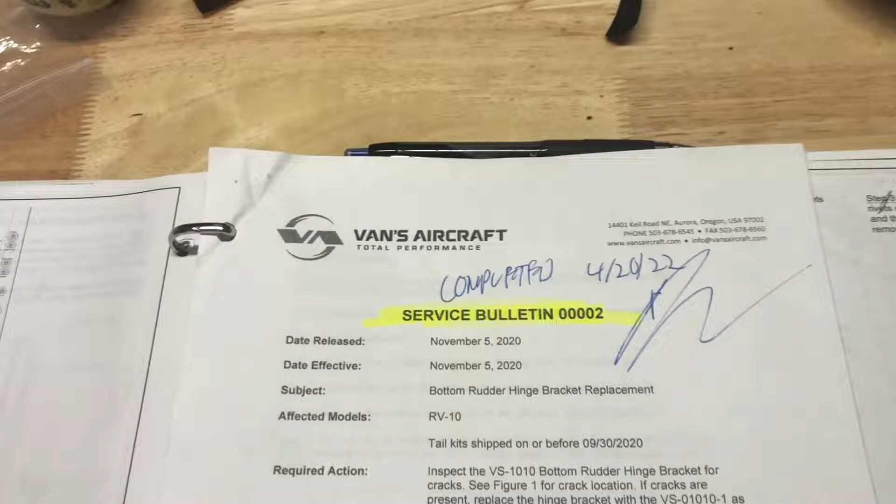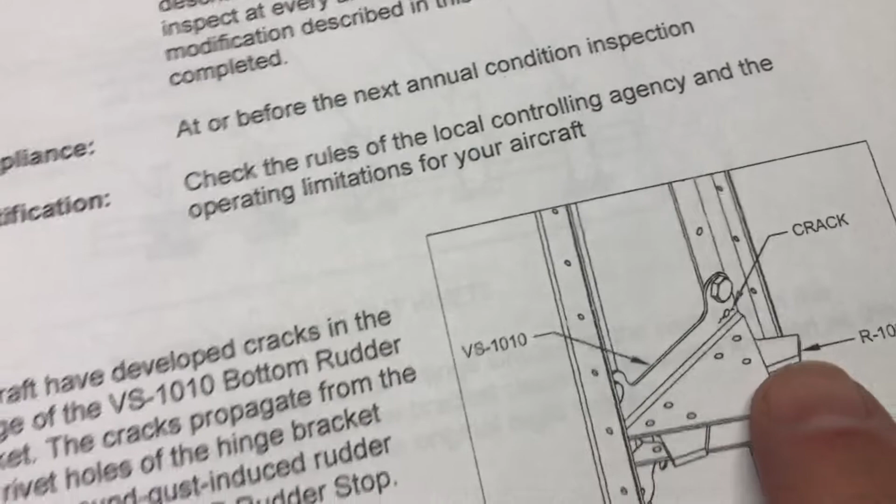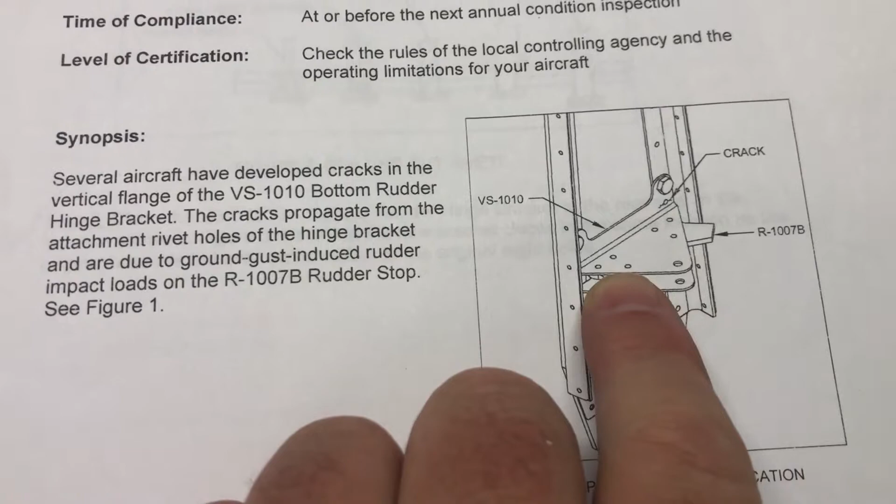Okay, so Service Bulletin 00002 completed on 4/20 of 22. So basically, this is addressing a potential crack in this style part. It serves two purposes: it's a stop, so that way the rudder doesn't over travel, and then the rudder actually connects through that hole into this vertical stabilizer.

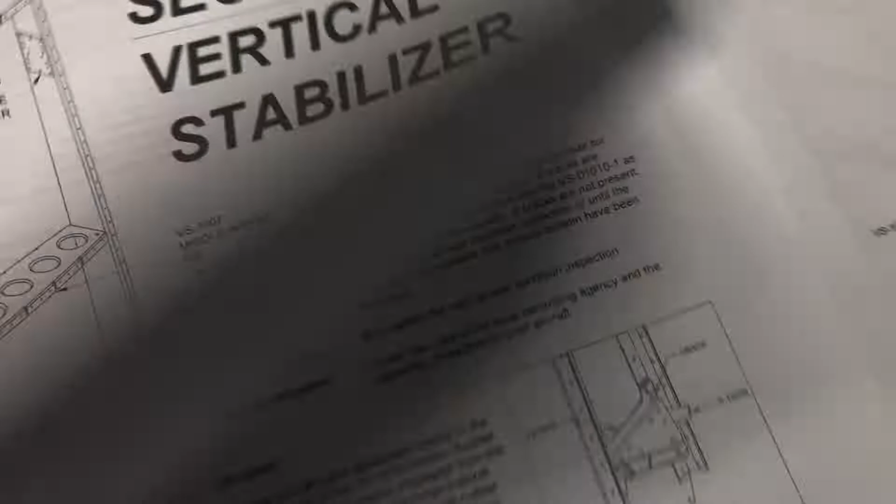So this is kind of a replacement of what's happening about here. My plans are dated 12/9 of 13, revision 0, page 6.4, so I'm sure this has been updated as of November 5th, 2020. The previous builder that I got this plane from completed that in 2019, about a year before the Service Bulletin came out.

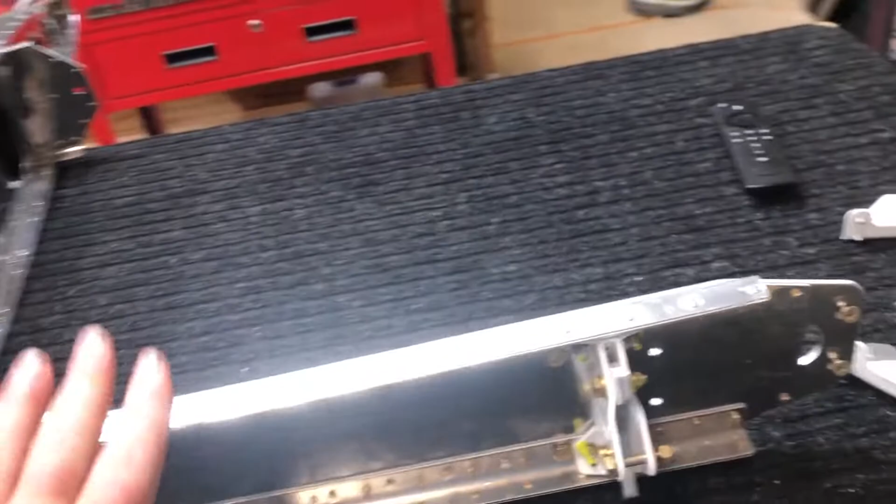Pretty straightforward. I didn't have to remove this from the airplane because it wasn't mounted yet. It was sitting on the bed in my guest bedroom, right? Where else do we put parts to our ginormous airplane that we're building at home?

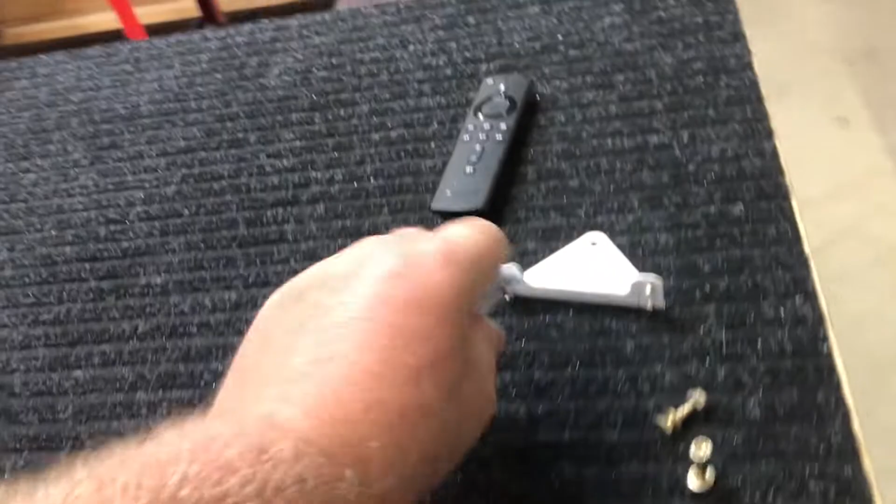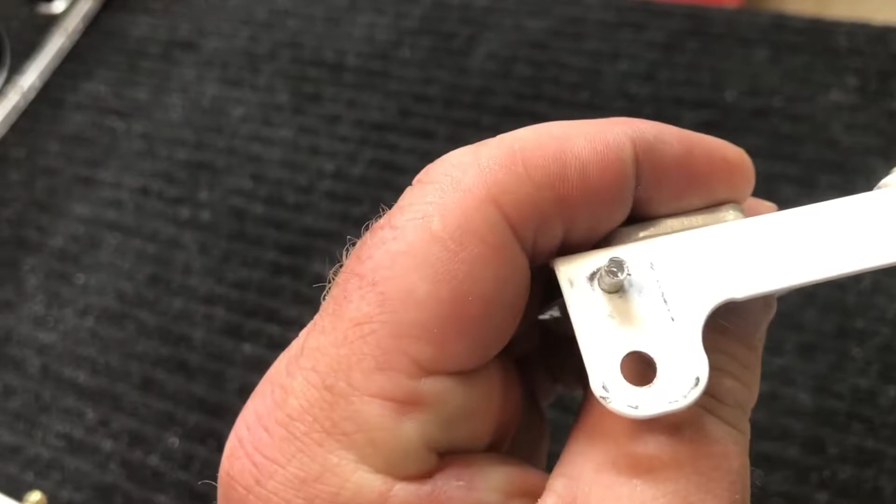So basically, you had to drill these out. There were 2 bolts and then 6 rivets. I did a pretty dang good job of drilling—look at how centered these holes are. I popped out the heads and then kind of hammered this out, so pretty proud of that. You just drill that out and then you pop a rivet into it, so it took up these holes: 1, 2, and then 3, 4.

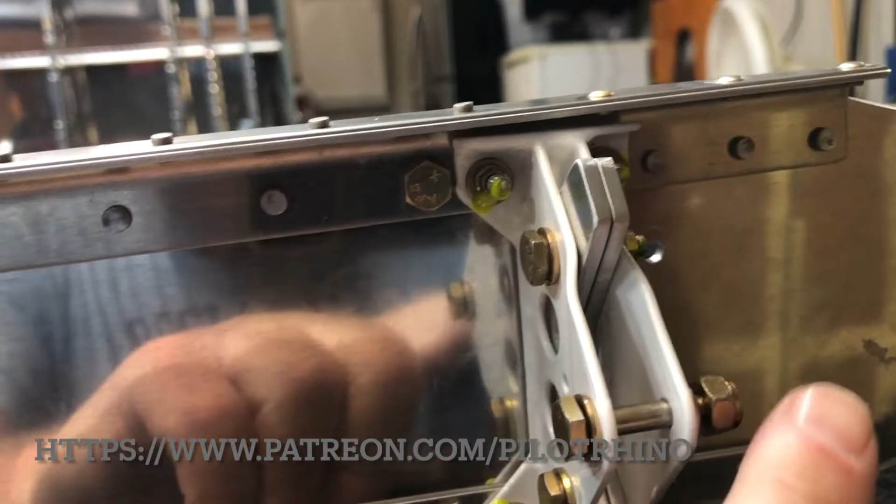So these bolts go back in, but they don't get bolted through this piece. You just put rivets here and here just to reattach that, and then you're only using these 4. So these used to be rivets, now they're bolts. It's pretty straightforward instructions, so yeah, that's about it.

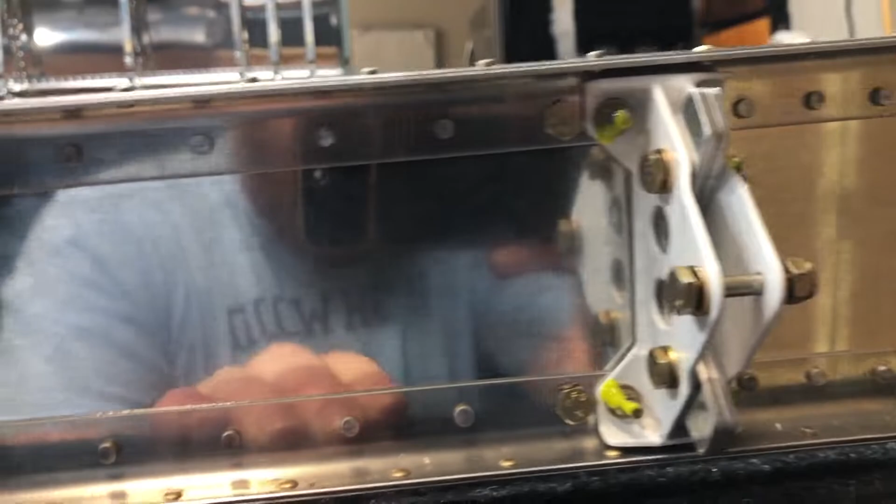There really was nothing fancy, nothing hard here, nothing to really take any time explaining—it went smooth. Just follow the instructions and make sure you do that Service Bulletin so you don't ever have to worry about it cracking again, hopefully. There you go. Bye-bye.